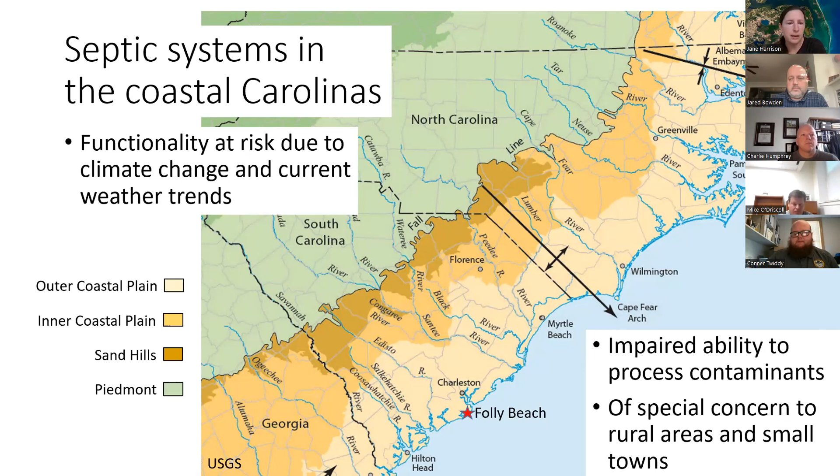So just what was our work about? We really focused on septic systems and on-site wastewater treatment in the coastal areas of our two states, North and South Carolina. And our concern is that their functionality is at risk due to both climate change and current weather trends. Not to mention just the general wear and tear of these systems when they're not maintained properly. And so when they're not working, there's impaired functionality, inability to process contaminants. And this is of special concern to areas that do not have access to centralized wastewater treatment, particularly rural areas and small towns, many of our coastal areas in both states.

So just in case anyone's a little shaky on what a septic system looks like, you can see from a private residence here, solids from your toilet, your wastewater is going to go first into a tank underneath the ground. So all of this brown is your soil treatment area. It's going to then hit the drain field, and then it is eventually going to reach your groundwater. So it's very important that you have sufficient soil treatment area under the drain field. And we refer to this area as the separation distance. So the vertical separation distance between the drain field and your groundwater is where the contaminants are going to be treated. And so with climate change, we see a few things happening, and you're going to hear much about that from Dr.

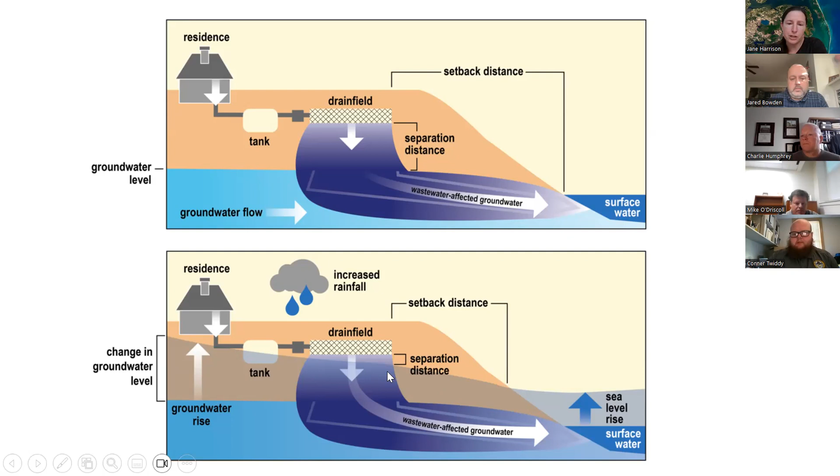We see sea level rise, we see increased rainfall at times, and then ultimately changes in groundwater level that reduces that separation distance or treatment area available.

So in my role in the research, I was working directly with Lauren Voorhees. She finished her master's at Duke, and we published a paper based on our research doing interviews with on-site system managers. So these are our installers, our operators of septic systems, cluster systems, as well as environmental regulators in both states. And so these are our takeaways, just very quickly.

We did find that weather and climate are not accounted for in system site selection and determining permits. We also found that current regulations are inadequate to deal with future climate risks. Next, we were happy to see that there are some resilience measures being implemented regardless of regulations. So we're able to highlight some of those adaptations.

And then finally, that truly we need adaptive capacity at every level increased, whether that's at the local municipal level, the household level, the state level. Education and communication with system owners is critical so that they can do the right thing.

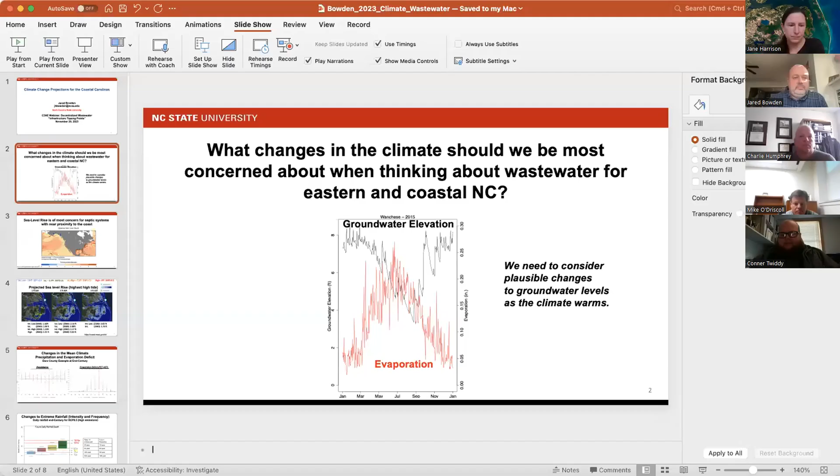So thank you. Today I'm going to talk about the future and thinking about climate change in the coastal Carolinas and in particular thinking about decentralized wastewater systems. And so the first thing that I think about is what changes should we be most concerned about? And it's great that Jane had that. I didn't know she was going to send out that list of questions and poll people.

But I think the big thing is thinking about the groundwater and the groundwater depth, and evaporation in particular is a very important control of groundwater, as well as other things like sea level rise. And so I want to talk in particular about when we're thinking about groundwater, what problems do we need to think about when thinking about Eastern North Carolina?

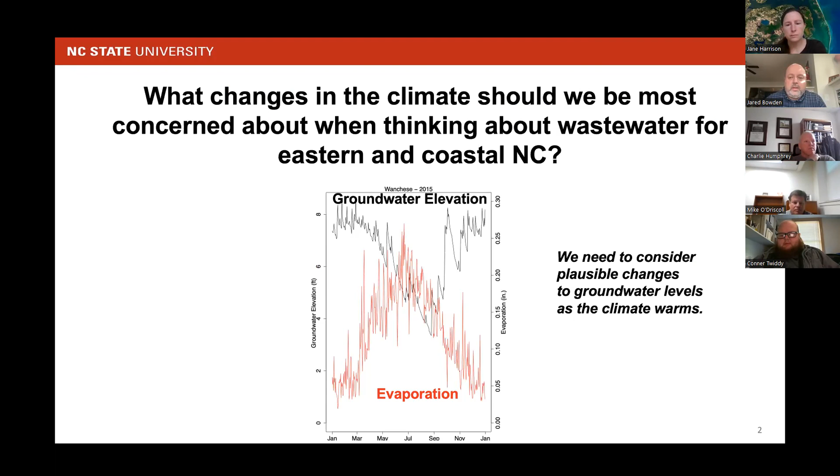And so the first big thing is sea level rise, especially for those within near proximity to the coast. This is a recent plot from the Fifth National Climate Assessment, which was just released a few weeks ago, and it's showing the average trend since the 90s in terms of sea level rise per decade, and you'll really see that the eastern seaboard is a hot spot of relative change in sea level rise, and that's an extreme concern for our coastal communities because we know that we've observed high rates of change of sea level within these areas.

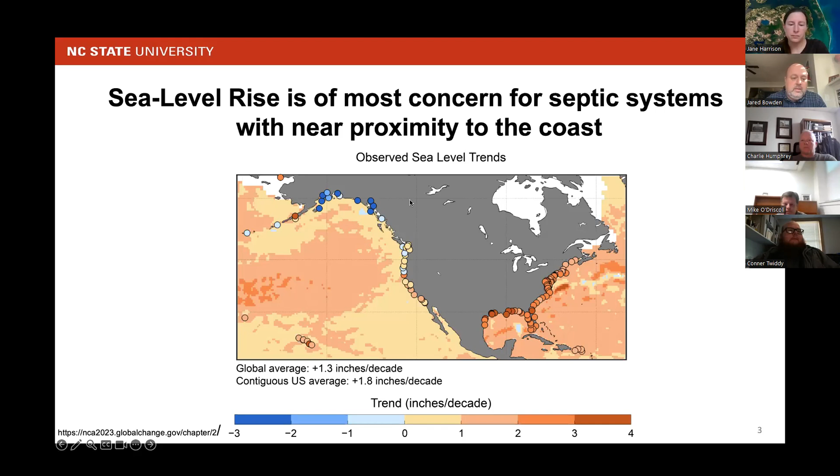So specifically, I took a look, and here there's a tool that NOAA has that allows you to look at sea level rise. But in this case, what we tried to do was relate different scenarios to the amount of global warming you may anticipate by end of century. And so there's an intermediate low, an intermediate, an intermediate high, and a high. And if you were to say where are we probably heading, it's probably somewhere in between the intermediate to intermediate high; that's kind of where the consensus in the science is.

But if you were to think about how much sea level rise you would anticipate, when would 1 foot of sea level rise occur? Even with the intermediate low scenario, that occurs within the next few decades. So 1 additional foot of sea level rise is expected at some point within the next few decades. Now, if you're thinking towards the higher end, and maybe about being very, very resilient, thinking about 3 feet of sea level rise, when will that occur? Even with the intermediate low and the intermediate scenarios, you're approaching that by end of century.

And so remember that intermediate scenario is kind of the place where we think it's very likely to be. And so you're looking even at a mid-century possibility, around 2050, 2060, of around 2 feet of sea level rise, upwards of 3 feet by end of century.

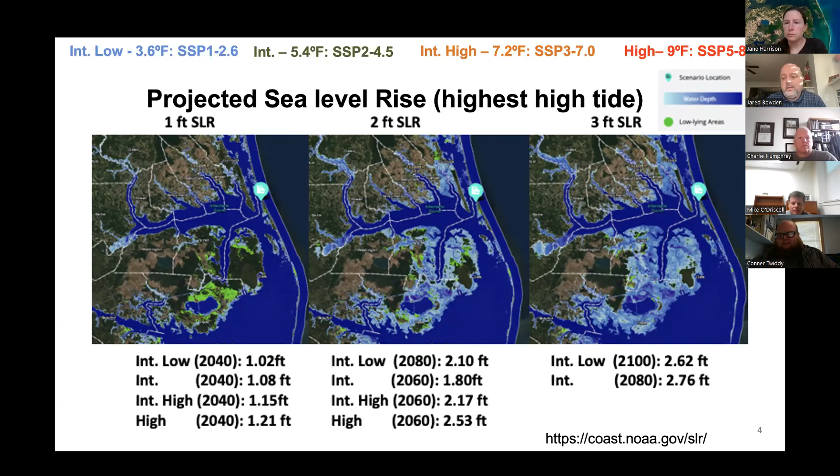So there are other things beyond sea level rise that are important when you're thinking about septic systems. In particular, changes in precipitation impact the groundwater levels, as well as how much evaporation you have. As I showed previously, there's strong seasonality in the groundwater depth. In particular, in the summertime, the groundwater levels are much deeper from the surface, simply because the evaporation demand is much greater in the summer. But here we're looking at the mean state of the climate and what will happen.

And one thing that's pretty clear from a lot of models that project out towards the end of century is that during the wintertime in particular, there's an increase. In general, across much of Eastern North Carolina, and this is a Dare, North Carolina example, there's an increase, but the uncertainty grows for the summertime in particular. And as you go to higher and higher emission scenarios, the likelihood of becoming drier increases.

But the big thing when you're thinking about this is really the evaporation deficit. What this is, simply, you're looking at potential evapotranspiration. So if you were able to take a surface of water and evaporate all the water away at a given temperature, how much happens, versus what actually gets evaporated when, for instance, soils dry out. You're not just a water body. And so what could potentially happen in the future if you take this difference and look at evaporation deficit?

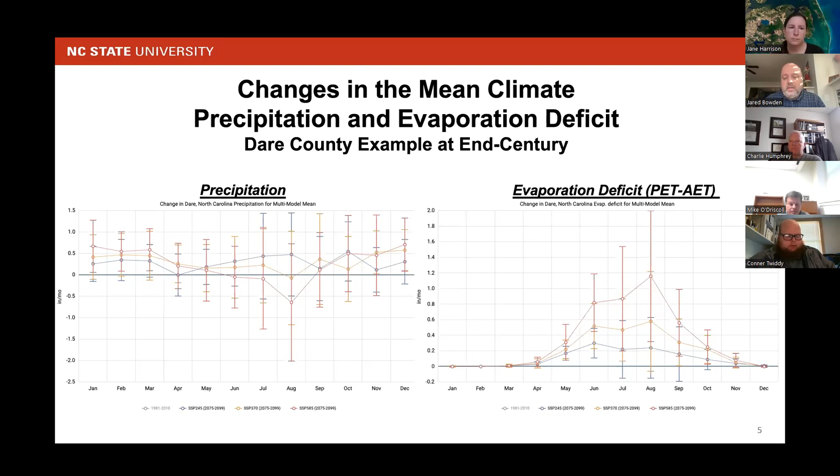There's another issue, and I don't know if Mike's going to show some of this, but the groundwater levels will peak very rapidly during intense rainfall events. So there'll be this time when you'll have extreme rainfall, and then your septic system isn't functioning as you would anticipate, simply because the groundwater levels are much higher or closer to the surface. If you look at how rainfall statistics may change in the future, we have a concern that the intensity and the frequency of rainfall will change.

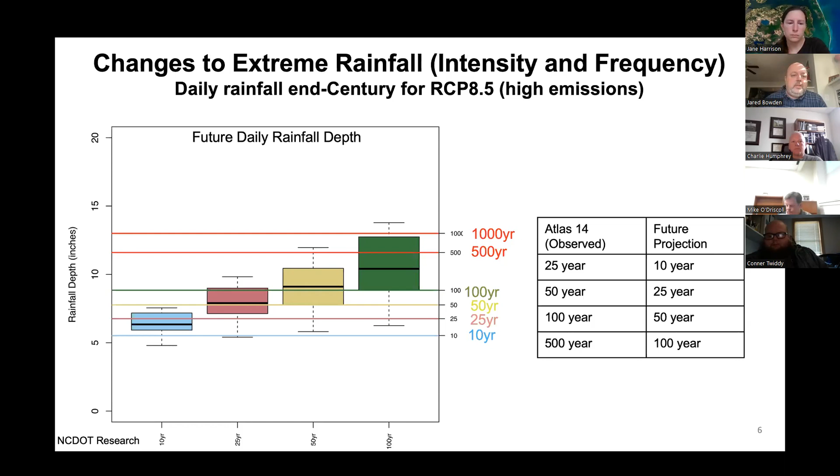And then in the poll we also talked about hurricanes. Hurricanes are just events that happen on occasion, and typically in North Carolina the return period of a hurricane is basically about every 3 years. And we haven't really had that. We haven't had a big storm in recent years, but if you're looking at the changes in precipitation totals, we

did these experiments that looked at idealized hurricanes in a warmer climate, and some of our big hurricanes within eastern North Carolina, including Matthew, Florence, and Floyd. And then we basically could simulate these same events in a warmer climate and see how much rainfall falls from these storms. And it's very significant. You're looking at upwards of 40 to 50% increases in precipitation totals.

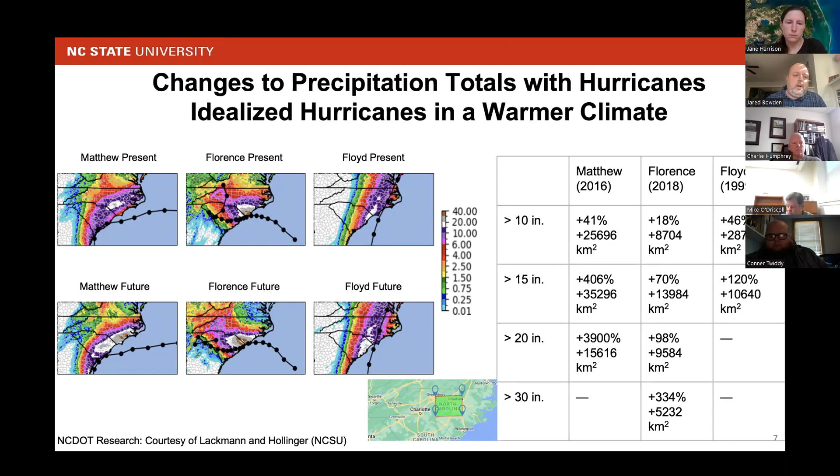And not only are the precipitation totals increasing at a location, but also the spatial extent of the precipitation is increasing. That's another problem that I think is a much bigger problem that Eastern North Carolina has to think about, and that's the big flooding events and what they mean for on-site wastewater treatment systems.

So just to conclude, on-site wastewater treatment will directly be impacted by sea level rise. And in particular, thinking about end of century, you're looking at 3 feet for even a lower emission scenario. The lower bound is around 2.6 feet, with possibly 2 feet by mid-century for higher greenhouse gas emission scenarios. There'll be changes in the mean state anticipated for the Carolinas for rainfall in particular and evaporation potential.

And so mean changes in rainfall will likely create additional problems, I think, especially in the winter when precipitation increases with minor changes in evaporation deficits. And then finally, I think the acute rainfall events are going to be the cause of acute failures across the state. And they'll be more frequent and more severe than what we've seen historically. For instance, precipitation intensity and frequency are anticipated to increase, like the 25-year event becomes like a 10-year event in the future.

And then I think we have to be really concerned about hurricanes. We live in a place where basically Eastern North Carolina kind of juts out into the ocean, the Outer Banks, and it's a place where a lot of hurricanes have hit historically, and I think we have to think about what that means for these septic systems, especially rainfall intensity, and that these systems may be operating for many, many months at times when these storms hit, not functioning as we would anticipate.

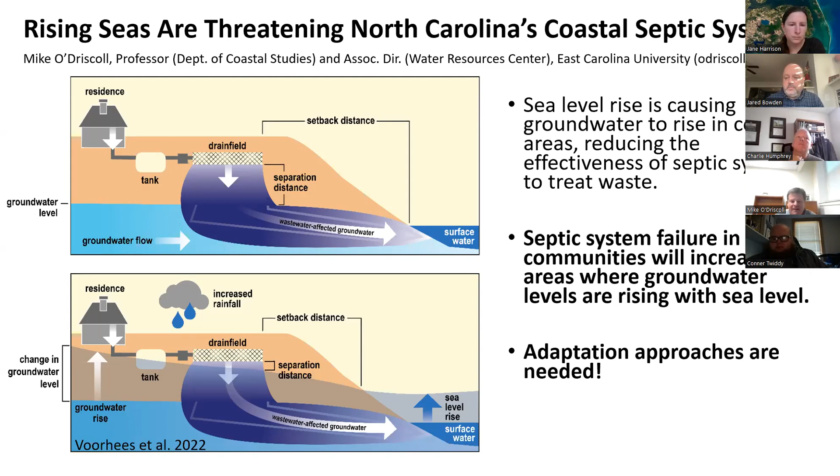So looking at the way that most residences in Dare County would treat their wastewater, using a conventional septic system. And of course, there are some other advanced systems that are starting to come into play now. But the main point is that for sandy soils, the state asks for 45 centimeters or 1.5 feet of vertical separation distance. So you want to have that unsaturated soil underneath the drain field to help treat some of the bacteria and viruses, and also for nutrient conversion and treatment.

Some of the field and column studies suggest it's really a lot better to have over 2 feet if that's possible. That's not what we have, but we use 1.5 feet for the sandy soils. And if you can toggle to the next, please, Jane. And so basically the dry soil is helping to filter the wastewater. Next, please. And near the coast, the challenge is just that the water table is going to be shallow. And so if this is changing over time, it can start to threaten these systems.

If you can toggle next, please, Jane. And so this is kind of what happens over time. We start to lose the unsaturated soils underneath the system, and it can reduce some of the treatment capacity. Next, please.

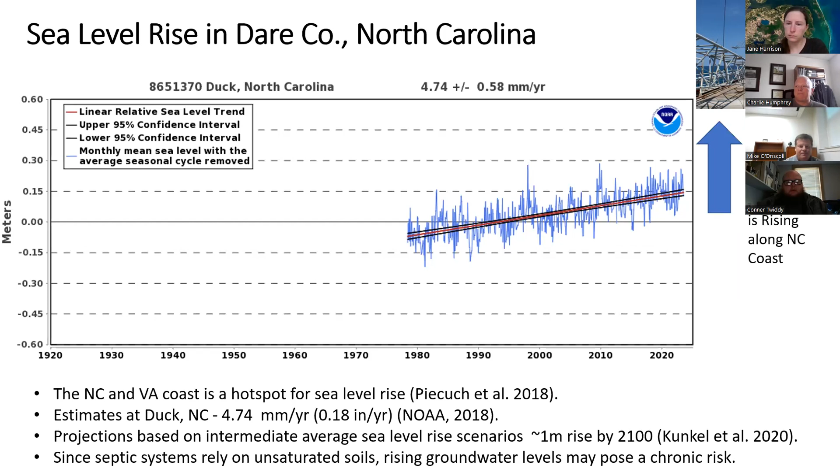And so for this project, we looked at some long-term wells in Dare County. These are DEQ wells, and they have a good network set up. You can see with the orange squares, those would be where there's some long-term wells. And then we also added 5 new wells around the area adjacent to septic systems to be able to monitor these. And Charlie's going to talk about this a little bit next.

But what we can notice is if you look at the average groundwater depth conditions over time, there's a trend where the groundwater is getting shallower over time, and it relates pretty well to that sea level rise curve that we looked at earlier. So the groundwater is getting closer to the surface, and so this is starting to cause problems for the on-site wastewater treatment. Next slide, please.

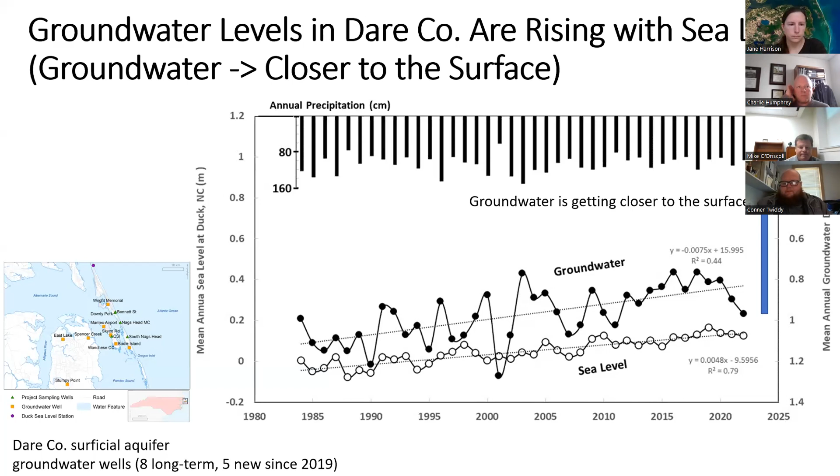And here's an example of what that looks like for an individual well. This is at Wanchese Community Center. And so basically, typically the septic system drain field will be buried at about a 1/2 meter depth. And so if you consider the 45 centimeter vertical separation distance, we would really want the water table to be a meter or deeper for functional septic systems.

And so I kind of shaded that in blue, where when the groundwater is in those levels closer to a meter to the surface, it starts to be unsuitable conditions for on-site wastewater treatment for conventional septic systems. So you can see back in the 80s, there were times when the water table was deeper, but as you get to the most recent 2 decades, most of the time the groundwater is within a meter of the surface, and sometimes it's even rising up to the surface. So this would indicate that it's making it more difficult for the unsaturated soils to be available for wastewater treatment from septic systems. Next slide, please.

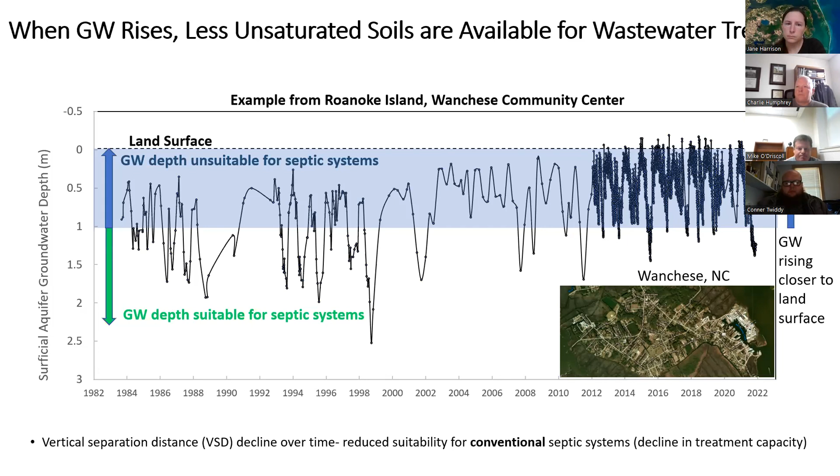So this is an example. There was a community member in South Nags Head, and you can see Charlie there. She actually volunteered for us to monitor the groundwater levels near her system. And this is a site that's about 5 feet above sea level. So it's a pretty low-lying area down in South Nags Head. And if you could toggle to the next, please, Jane.

So when we lifted up the cap, so this is appetizing right before lunch, sorry about that. We could see the inlet pipe coming from the home. You can see how that's inundated, right? That's supposed to be gravity drain. There's supposed to be some space there between the wastewater in the tank and the inlet pipe. And what this told us is basically this system is being flooded by groundwater.

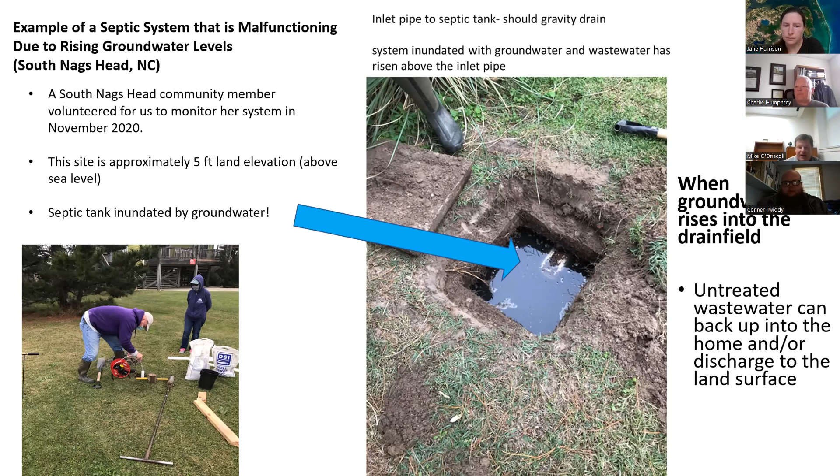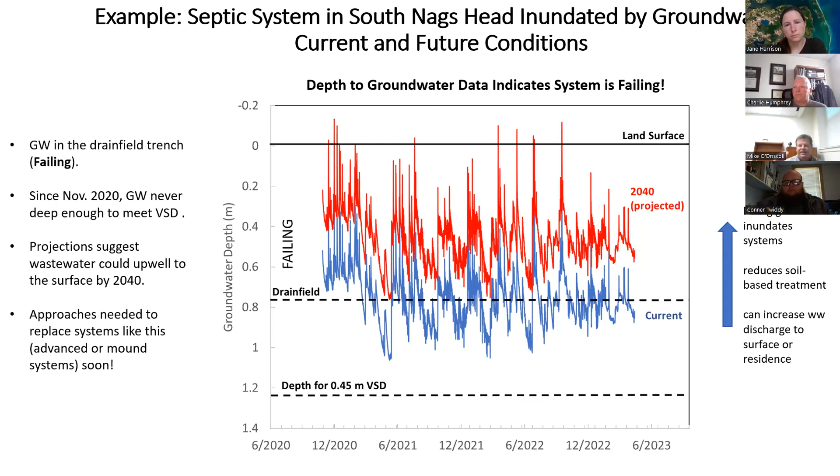When we use the groundwater level trends that we've observed, we could see that by 2040, if you project this forward, that would indicate that the wastewater would start upwelling to the surface during storms like Jared had mentioned. So over time, it's starting to make these systems that may have been permitted properly back in the 80s lose their functionality. So next slide, please.

And one screening tool, as Jared mentioned, the NOAA Sea Level Rise Viewer, I just point out here the location of that particular site. And this would be projecting forward to 2100. And those areas that are inundated by 2100, those will be sites that are likely also experiencing groundwater inundation of their septic systems right now. So this tool may be helpful to kind of screen and understand sites that are currently vulnerable.

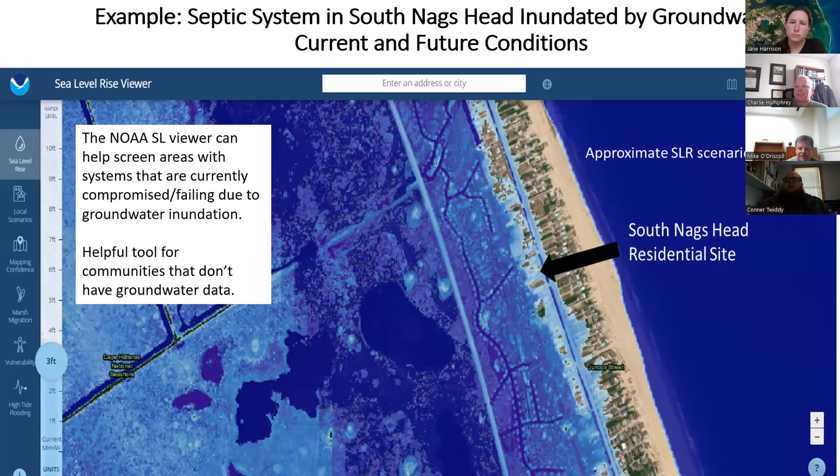Next slide, please. And so this is kind of the situation at that residence and some of the residences nearby, is that the groundwater's risen up into the drain field and the unsaturated soils have shrunk, and so their capacity to treat has been diminished. Next slide, please.

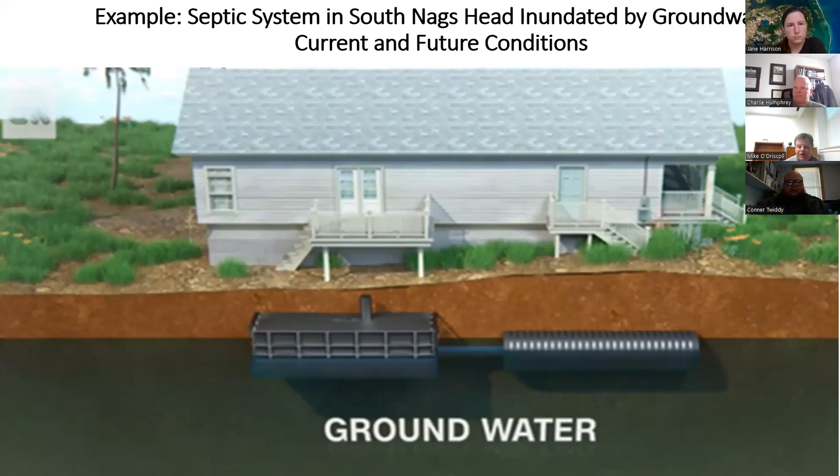And this situation has been observed up and down the Atlantic coast from Rhode Island down to Miami. This particular figure here is from some of the work in Miami, where they show over time, with rising groundwater levels, you go from systems that were functional when they were installed to compromised systems that don't have enough vertical separation distance for proper treatment, and then failing systems where the systems are actually being flooded by groundwater. Next slide, please.

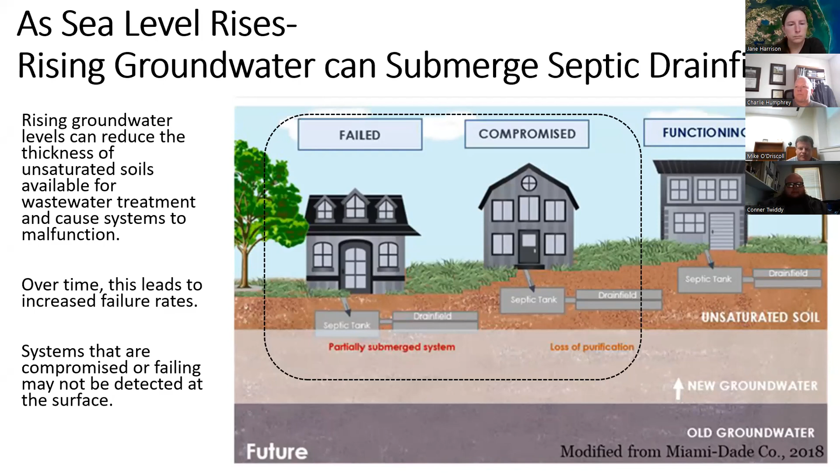So some of the things we found in this study: a good screening tool is land surface elevation. This can tell you a lot about the approximate groundwater depth. Typically what we saw is when the land surface is below about 7.5 to 8 feet above sea level, the groundwater table is typically within a meter of the surface. And so that can help screen to understand areas that are very vulnerable.

Alternative systems, there's some new advanced engineered systems and mound systems like I show in this figure here, can be some possible adaptation approaches to help create conditions that are more suitable for wastewater treatment. Maintenance and reduced water use can also help with compromised systems. Most communities don't have a septic system database or monitoring on their systems, so more of this can be helpful to understand the linkages to human and environmental health.

And then, as Jane started out with, the current regulations generally assume stable groundwater levels. And so in the future, in these areas where the groundwater is rising, I think we need to account for that in our regulations to adapt to this. Based on the trends that we saw, the risks of septic system failure in coastal areas will increase as groundwater levels rise with sea level.

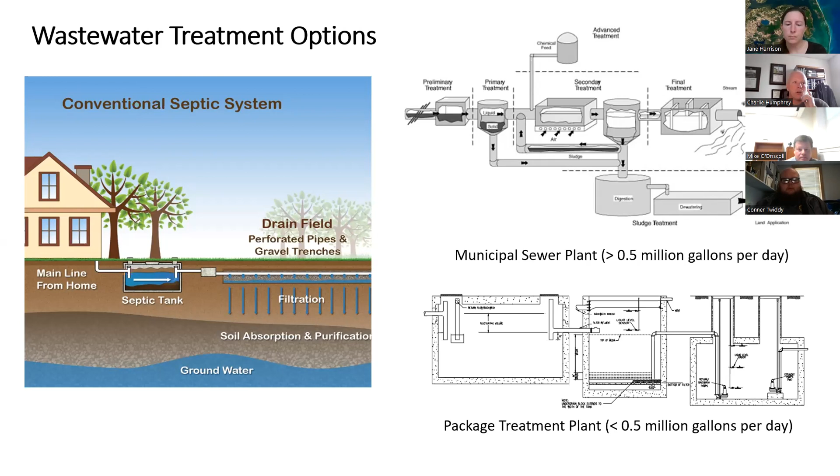And as Mike mentioned, there are individual septic systems that sort of look like package plants, but they're even smaller scale. So again, we defined on-site as septic systems in someone's yard, package plants as treating less than 500,000 gallons per day, and sewer greater than 500,000 gallons per day. Next slide.

So we were able to find volunteered sites that had septic systems and these package and sewer plants across eastern North Carolina and also in South Carolina. These are just some locations from where we had volunteers that allowed us to monitor their systems and the treatment plants. Next slide.

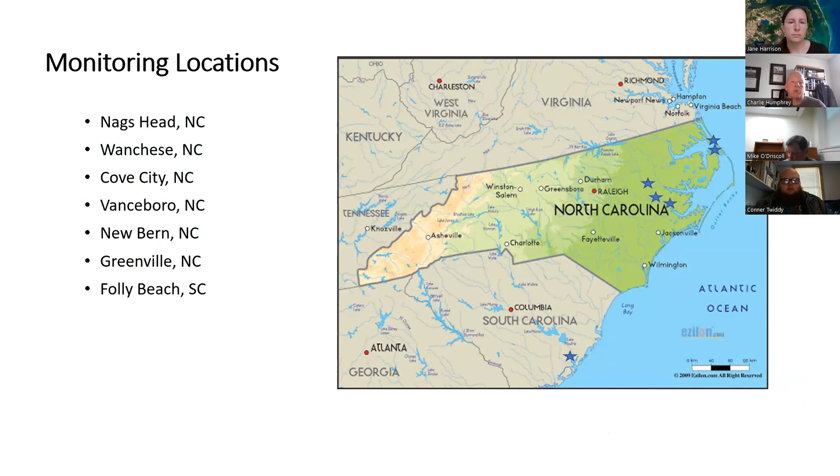We had 8 sites altogether that we monitored during this study. 5 were brand new sites we had no data on that we instrumented. And then we used 3 of our existing sites that we had longer term data on.

But from these sites, again, what we would do is collect wastewater samples from the septic tank, and then we'd collect groundwater samples near the drain field trenches, and we look at things like nitrogen, phosphorus, bacteria, and those differences. And prior to collecting the samples of groundwater, we would take a depth of water. So then we knew how deep it was to groundwater, and we also knew how deep the trenches were, so we could determine that vertical separation. Next slide.

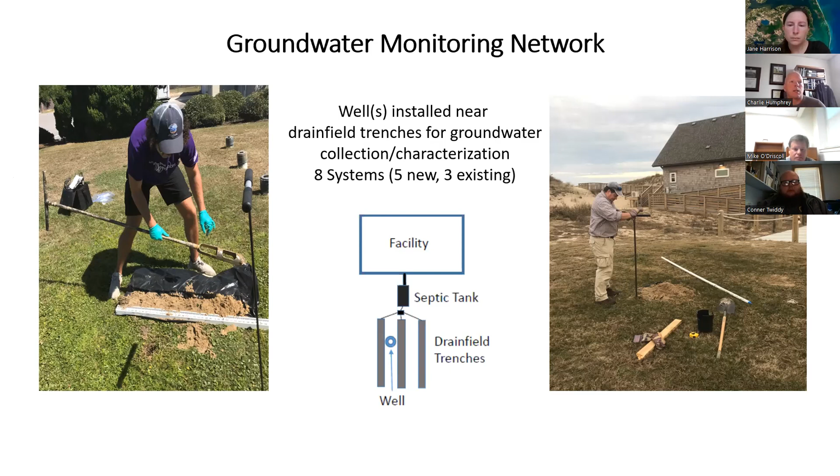For the sewer plants and the package plants, it was a lot easier to collect the data. We didn't have to install wells. So we would collect an influent sample, we would collect an effluent sample, and we would compare those two. And during the same months that we sampled the septic systems, we also sampled the sewer and the package plants. So they were sampled at the same time during the year with the same number of samples. Next slide.

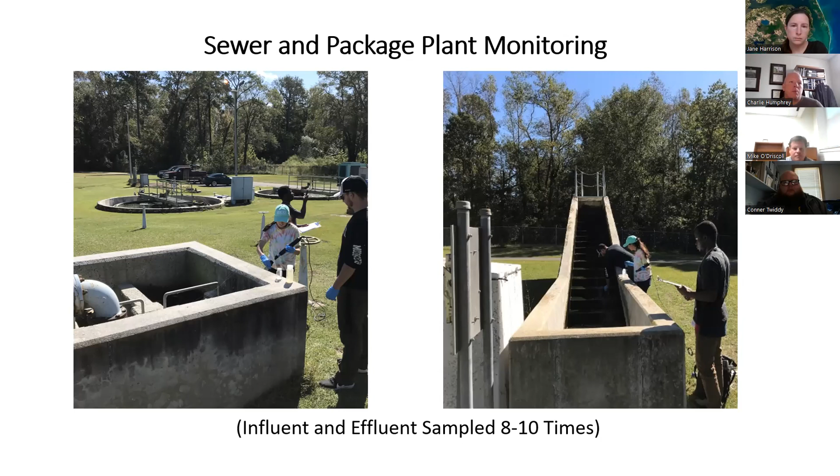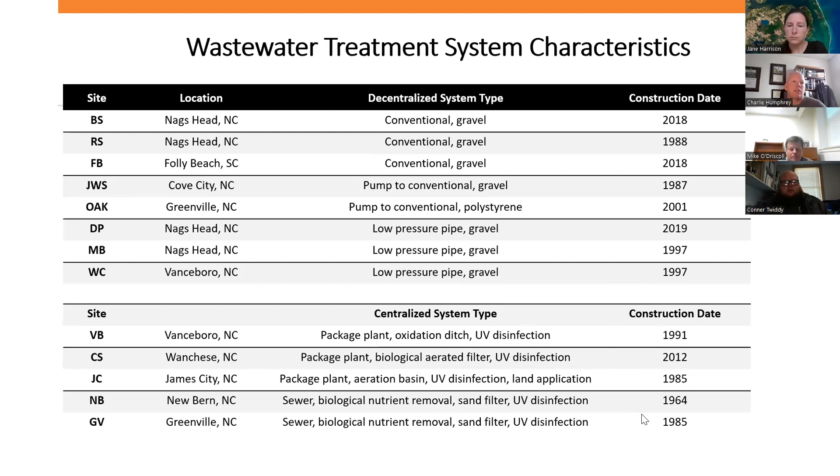These are just some of the characteristics of the individual sites that we monitored. We had a variety of septic system technologies that we studied, and we had 2 large sewer systems that we evaluated, and then 3 package plants. And that's just some of the characteristics of those sites. Next slide.

So there is some additional processing, but we didn't sample groundwater at the site. They didn't have wells there, and we didn't install wells there. So I just wanted to point that out. There should be some additional processing before that wastewater actually reaches a natural water body.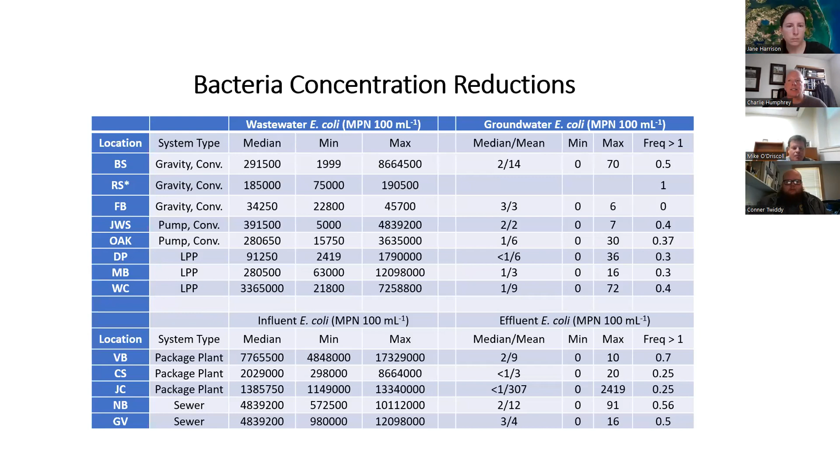Next slide. So just to summarize, again, comparing these different options and technologies, the centralized sewer systems were the most efficient at removing nitrogen. The septic systems were the most efficient overall at lowering the phosphorus concentrations. All the technologies were pretty efficient at lowering the bacteria concentrations. But again, going back to the septic systems, which is kind of the focus of the study, the separation distance is so important for that treatment.

And like Mike was saying, and like I'm just discussing now, we don't really monitor groundwater levels near systems. That's not a part of the permitting process. And as sea level rise increases and separation distance decreases, that can really cause problems for the efficiency, which we may not be able to determine on site without actual groundwater data. So just some things to consider.

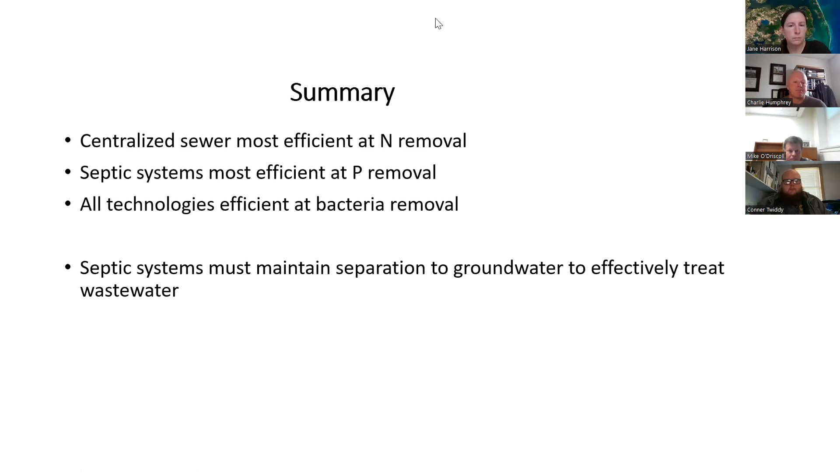Okay, great. Thanks, Charlie. I'm going to turn it over to the town of Nags Head. I do want to note there are a number of folks out here that are in the management realm in this topic. So if there's anything that's coming up that you're thinking about as we're all chatting, please just let us know. Anything that you're seeing out there that's either perhaps different or just interesting to note.

I'm bringing up your slides, Connor. Give me a moment.

All right, here you go.

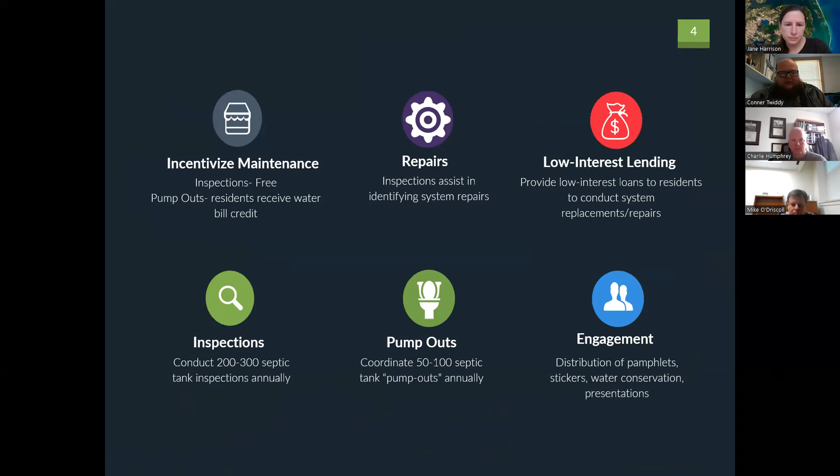And I guess we can go ahead and get started. Just for time's sake, we'll get into what the program has to offer. If we keep going just a little bit more. Yeah, we'll just keep going.

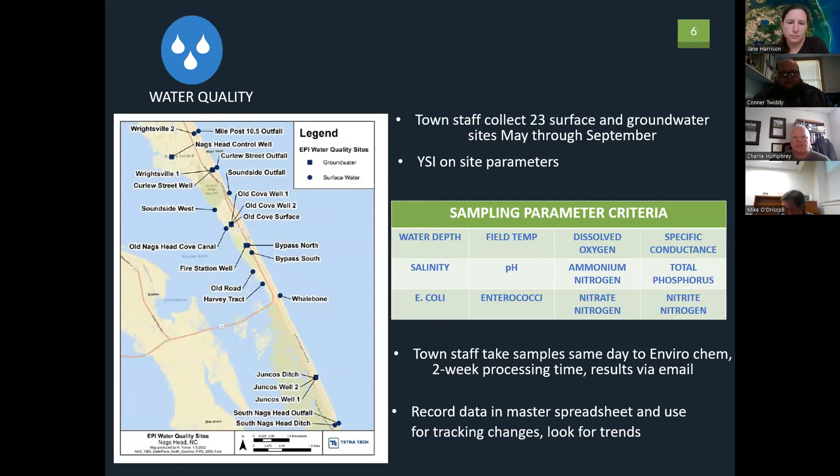Some stuff that we did in the past: we've done direct mailers through our DWMP, the Decentralized Wastewater Management Plan. It highlighted the different wells and other areas that we wanted to expand to get different groundwater monitoring logs. We got 15 groundwater level monitors and 2 water quality monitors that are going to be installed within the next month. Just a quick update on that part right there. We can keep on rolling through; I know we're a little tight on time.

So what our program for the town entails is we offer a free annual septic inspection. We help locate tanks. If your tank has a filter, we will come out there and clean it, either myself or I do have 2 contractors that help do the inspections. If during the inspection we find the tank needs to be pumped, then we offer a $150 water bill credit that the resident can get once every 3 years.

And then if we find an issue with the tank, whether the water level's too high or it seems like the drain field's not taking the water, we offer a low interest loan. The resident can get up to $12,000 for up to 36 months.

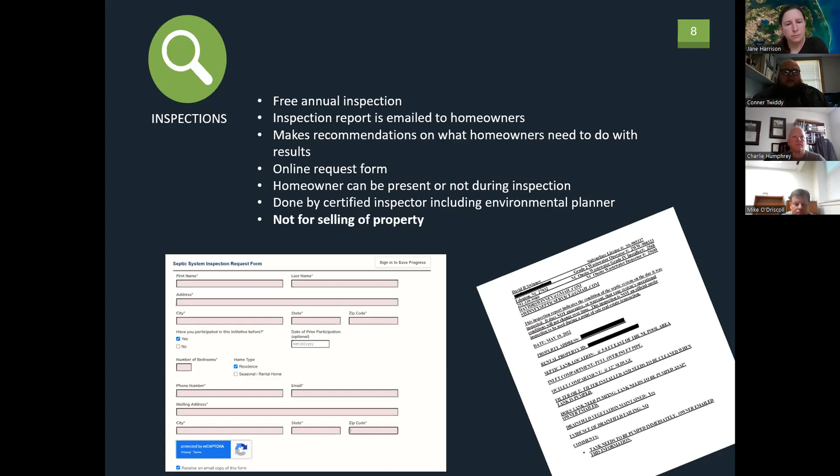There's just some quick background on the inspections and the request form. We have it so the homeowner can either be there or not, depending on if they've done it before. We like offering the educational part of it. That way, in case the owner has questions, we're there in person and they can ask us, and we can try to help explain what does what. And obviously, these aren't quite as in depth as a point of sale inspection, so they do not qualify as a point of sale inspection.

And then, like I said a minute ago, the water bill credit's $150 once every 3 years, within a 90-day turnaround period from them pumping it out. And Connor, can I ask, does that pay for it? Is that enough these days? I mean, roughly. I've seen $410, so it gives you about right at half. Gotcha. Pays for part of it. Yeah, pays for part of it at least. Better than nothing.

And then we have the loan. Just make sure you're all paid up on your town bills, water taxes. Just need a quote and the permit from Dare County, and then we can do the payment schedule and get up to 36 months to pay it back.

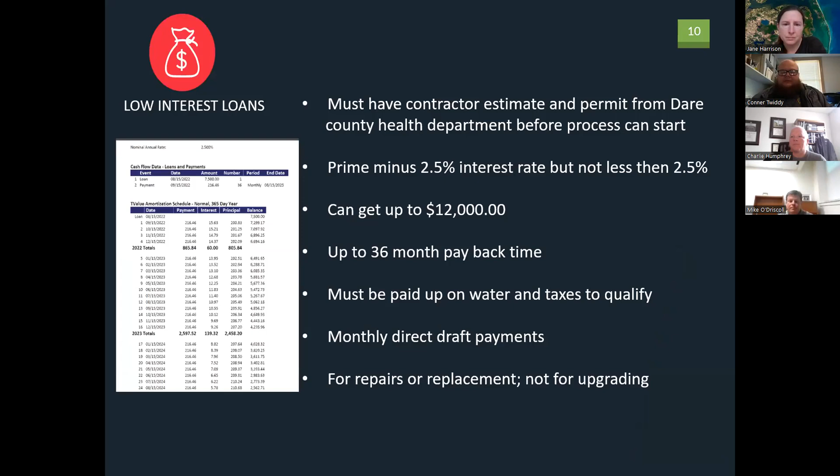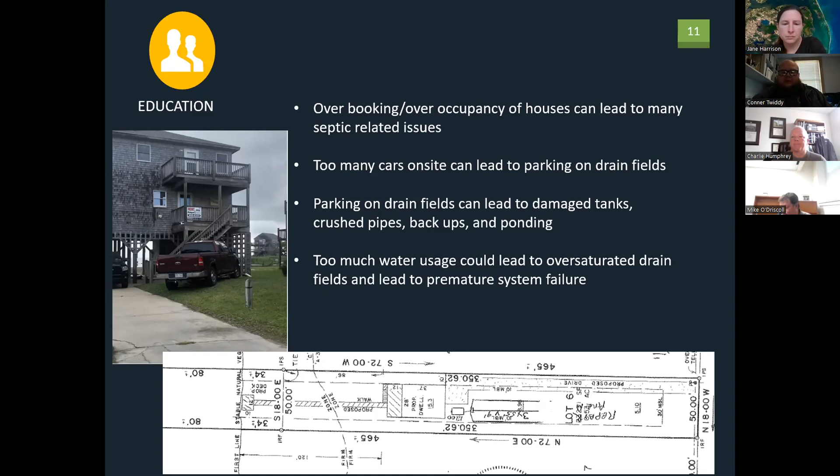Some things we're working on now are more educational. We've had some issues brought recently of people parking on drain fields during the summertime, especially with rental houses, and we're trying to come up with ideas of getting out what damage can be done to systems with people parking on them or driving over them when they're down visiting. We're talking about having more posts and ropes around the drain fields, putting up signs, having it in the rental agreements, no parking in this grass area.

So I was just reading the question that just came through. Unfortunately, we are the only town in Dare County that has a program like this. Yeah, and I think the town of Nags Head is really a leader for North Carolina in much of this too. So it started in '99. They did the first DWMP in 2005. They just updated the plan April of last year. Everything took effect July of 2022, and we're slowly making progress on the recommended updates.

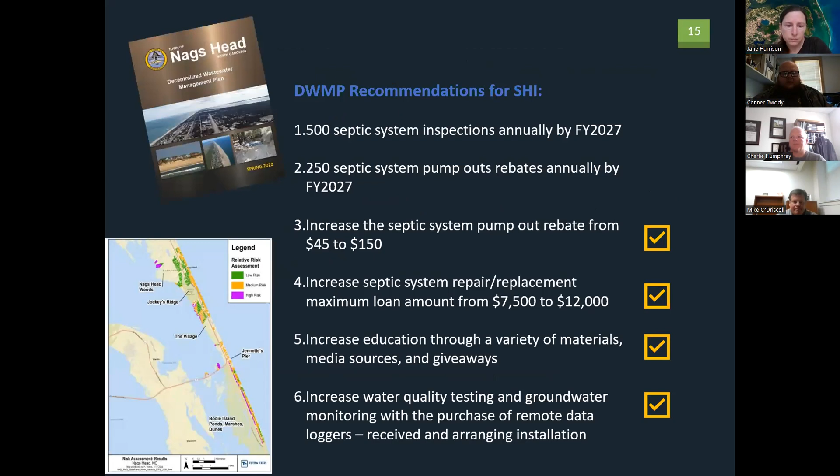So that's kind of where we're at so far. So we're getting there. And then, instead of doing the voluntary subscription service, we made the Septic Health Committee to work on what the program already offers and boost up what we already do before trying to take on a whole new big aspect of the program. That's it.

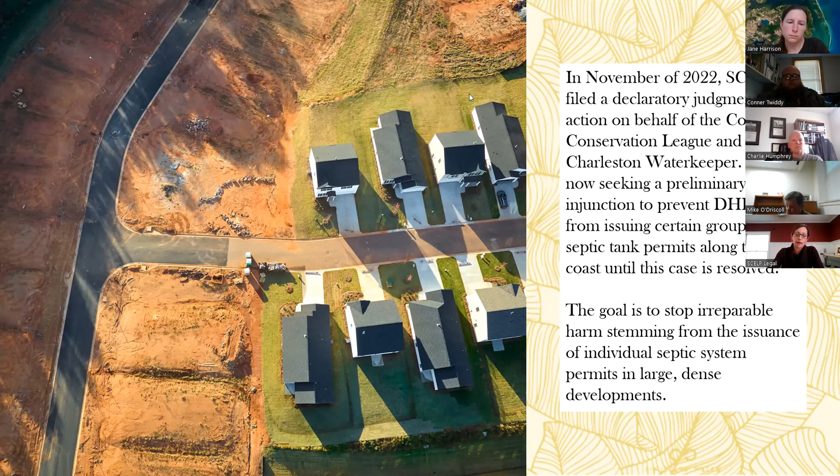She provided a very extensive affidavit in support of our motion and provided the court with a lot of really valuable information about the dangers of having these septic tanks. It's been very frustrating because the judge heard our motion in September and still has not ruled as to whether or not this injunction's in place until the case is actually heard on the merits. So we're still waiting for that, but the kind of developments we're seeing down here are really extreme.

We have a development in Berkeley County where there are 800 lots proposed, some less than a third of an acre in size, all on septic tanks, all out of a sewer service area. In northern Charleston County, over 200 lots, all with septic tanks. And again, that one was about a mile from the Cape Romain National Wildlife Refuge. I could go on and on.

I mean, Johns Island, there's just an inundation of high density development, which I'm sure is also prevalent in North Carolina. So that's kind of why we're focused on the state and trying to get DHEC to do its job. We have a couple other ones that I'll just touch on very briefly because I know we're short on time.

We have had 2 cases where we became aware of a septic tank permit that was issued by DHEC, and did our best to find out, submitted a Freedom of Information Act request, and they failed to comply with the provisions of the act. Asked them on multiple occasions, no public notice, so we had no way of ensuring that we knew about it. And these permits get issued, and we find out a month later.